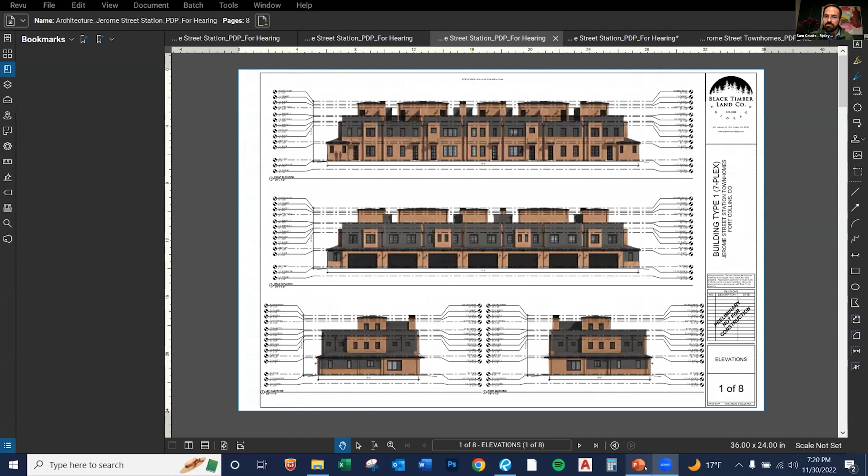Okay, thank you. Okay, can you see the screen there?

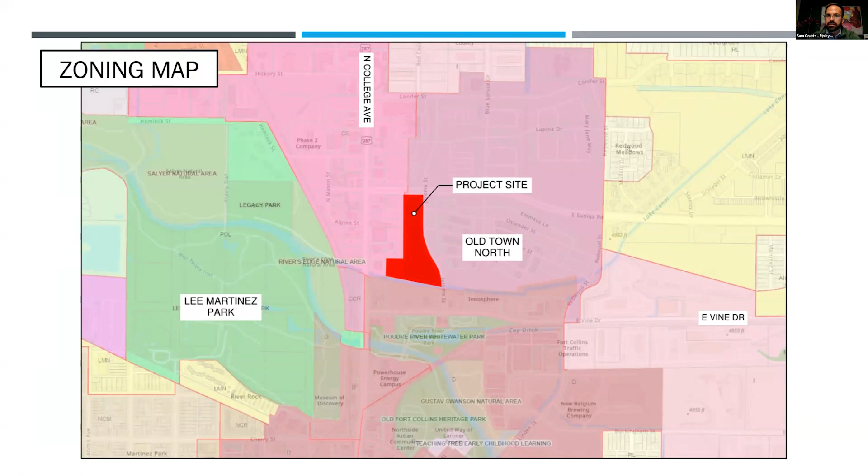Yes, thank you. Great. Again, my name is Sam Coutts with Ripley Design. I'm a land planner and landscape architect, representing the applicant, Black Timber Land Company, for the Jerome Street Townhomes. As Clark mentioned, here is the roughly 7-acre site. I really just wanted to highlight, as Clark did, the split in the zone districts here. We'll talk about that a little later.

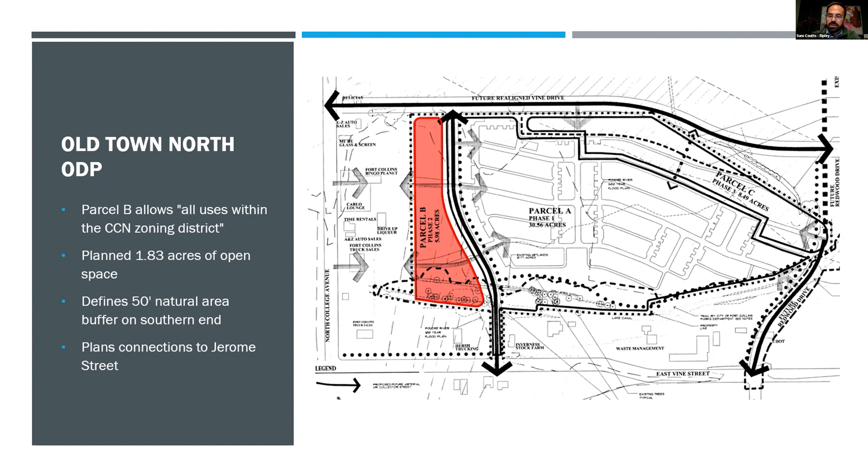To kickstart, just to bring you up to speed on a little bit of history here at Old Town North - this parcel was originally conceptualized as part of the Old Town North Overall Development Plan, ODP, highlighted here in red as Parcel B. The majority of our site lies within that Parcel B boundary, and Parcel B allows for all uses within the CCN zoning district. It doesn't place any kind of use restrictions other than that, or density restrictions otherwise. It does plan for 1.83 acres of open space and defines a 50-foot natural buffer on the southern end of the property. Additionally, it master plans some connections from Jerome Street - east-west connections for vehicular movement.

More history on the project - you'll notice as you review it that it started in 2020 with the same PDP number, which talked about a multifamily project. Just wanted to bring this up to show where we started. In 2020, we submitted the original PDP with 3 multifamily buildings and a small 3,000 square foot commercial space. This had one full round of review under PDP and a neighborhood meeting associated with it. It was a 4-story product with about 2 acres of open space. Through that process, we've learned a lot since then in the last couple of years.

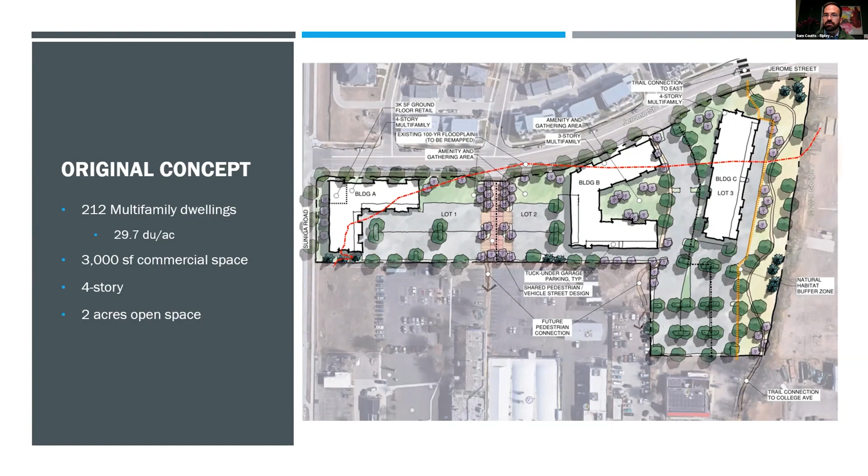We heard in that neighborhood meeting some concerns about density and height, along with changing market conditions and some technical issues we were running into with this project. We have since pivoted and are now presenting a single family attached concept here tonight, which is before you.

So this is the current site plan. There are 66 dwelling units in 12 different single family attached buildings, for a total density of 9.25 DU per acre. The buildings are oriented around the perimeter of the site along Jerome Street and Suniga, and then on the southern end along Lake Canal and a major walkway spine that defines the western boundary. We'll talk about that a little more later.

Each building is rear loaded through either a public or private alley, and all front either the major walkway spine or a road.

The project proposes 3.29 acres of open space, well above the open space originally envisioned in the ODP. There are 160 parking spaces provided, most coming through the 2-car garages each unit will have. There are 25 surface parking spaces scattered through the site - some on the north end with building 1, some between building 6 and 9, and then just north of building 10. There are only 132 required, so we're well over the requirement, and that doesn't include on-street parking on Jerome Street.

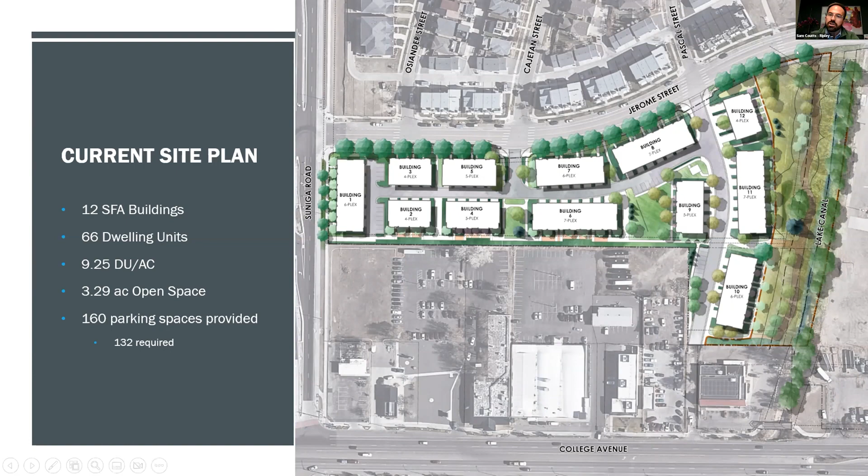Connectivity has been an issue at the forefront of this design, so I wanted to take a little time on that with this slide. The two main points of access for the development will be off of Jerome Street: one to the north, where there's an existing stub on Jerome Street for Cajetan to be extended.

As well as one on the southern end for Pascal Street. Starting with Cajetan, it's a private street stub that feeds into a private alley running north-south to load those rear-loaded, alley-loaded buildings. The public alley is dedicated along the southern end, a public dedicated right-of-way that creates an extension of Pascal Street, and this is a public alley.

It is a modified public street section, shown here on the left, and the purpose is to create something in between an alley and a street. It's an alley in the fact that we're rear-loading garages, so it'll feel and act as an alley, but it acts more as a pedestrian street that also contains vehicular movement. We've worked extensively with city staff, both engineering and planning, to create this meaningful connection between Jerome and College Ave, which the original ODP saw as important in this area. So that's the one piece of public right-of-way dedication on the site.

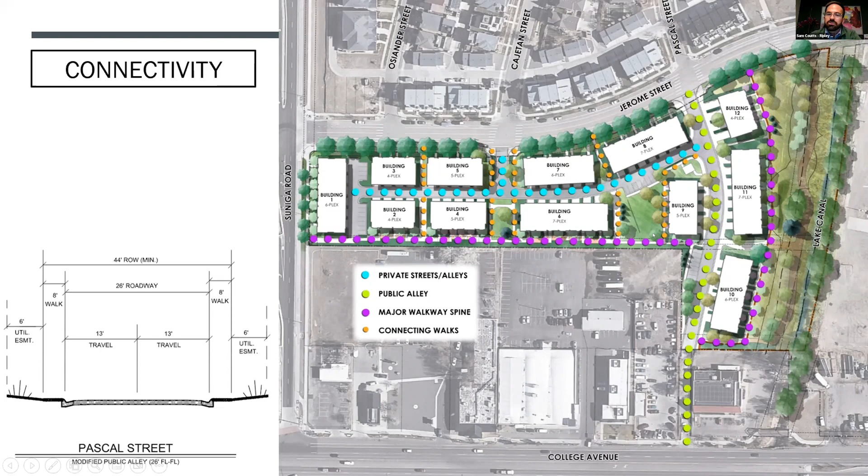Outside of on-street circulation, this project completes a connection for a public trail system. There's an existing public trail to the east in Old Town North, dashed in red here, which today dead-ends into Jerome Street. We'll be continuing that along the southeastern portion of our property, and the recently approved Powerhouse 2 development connects all the way down to the new Whitewater Park off of Vine.

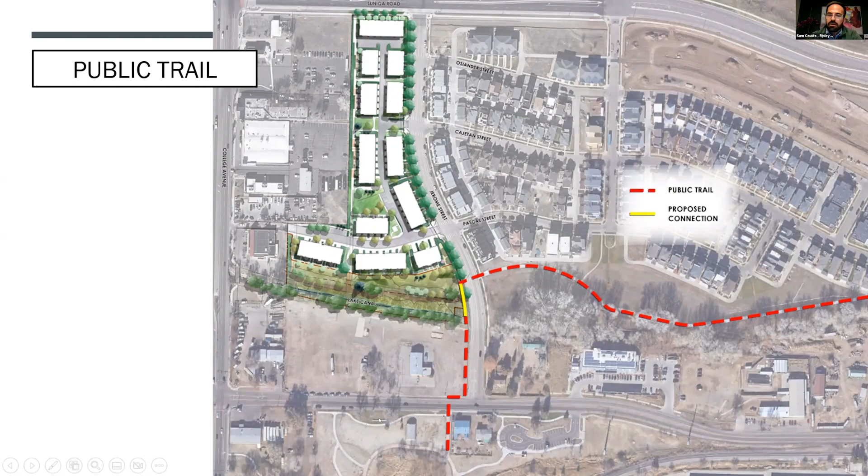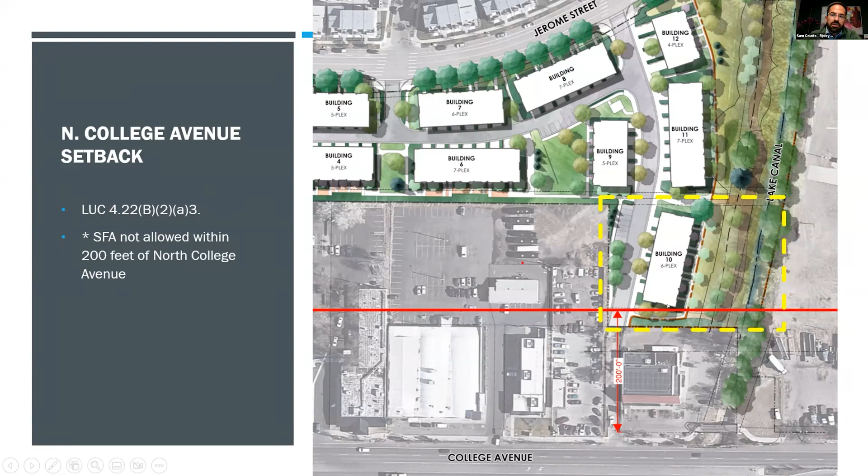Really quickly wanted to touch on this. This is the only really important piece of knowing the split zoning between the CCN and the CS - this parcel, as we know, is the CS. The only limiting factor from a design standard standpoint is that the single-family attached use is not allowed within 200 feet of the College Avenue right-of-way. So this is that setback.

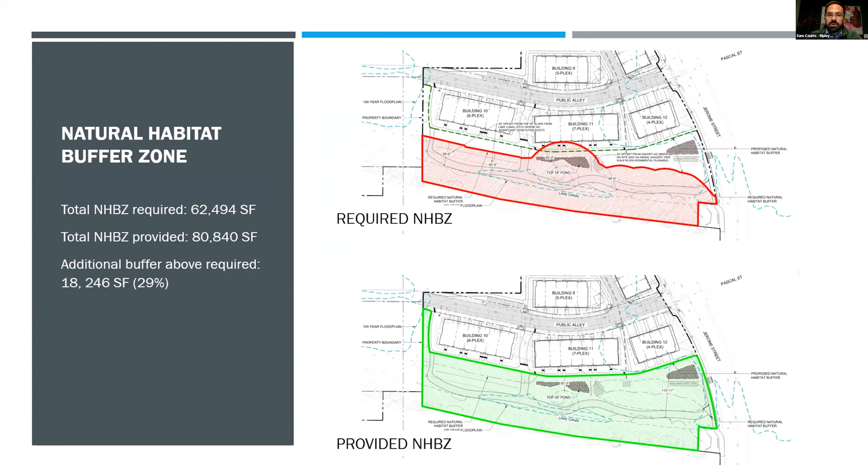The architecture here has taken a lot of those design cues, and the big idea also ties back to some of the industrial heritage of the North College corridor. That's represented in the materials - again we see a pedestrian-oriented brick base with a stucco middle, carrying the brick up to this half story that is a walkout rooftop patio. So these are 2.5-story buildings; the top is just a stairwell to the patio space above. The buildings have been broken down to mimic similar proportions of other single-family attached and single-family detached homes throughout Old Town North, creating these individualized units and helping create separation and scale.

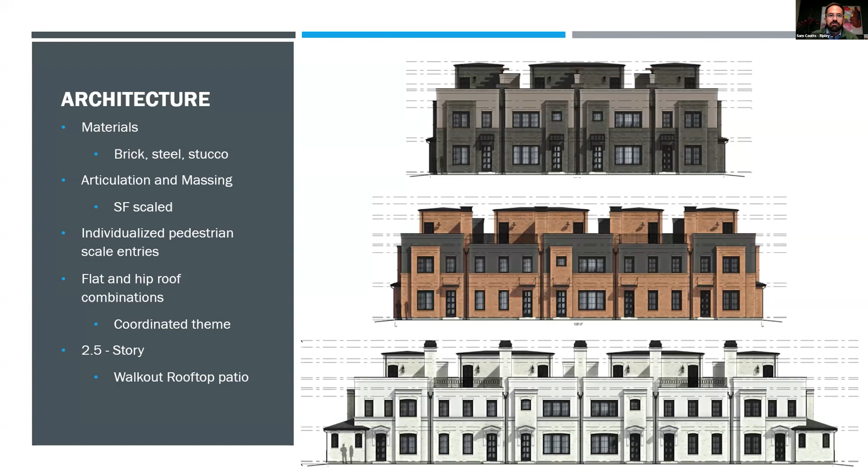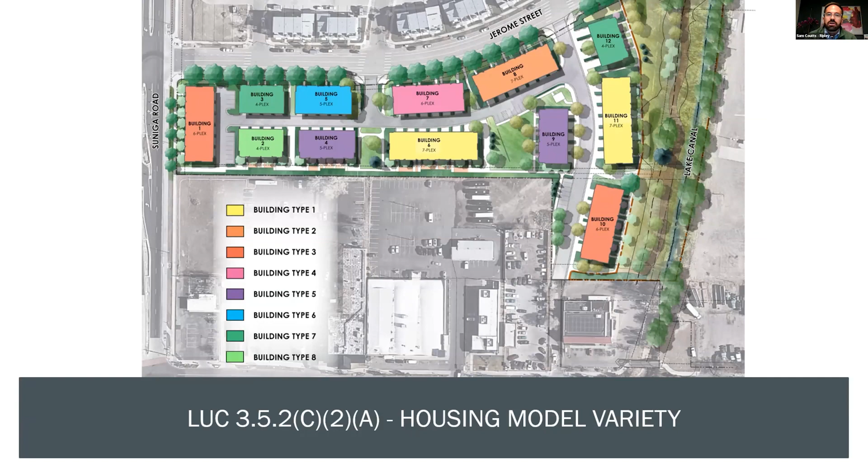As seen in this graphic, the land use code says not to place 2 similar buildings next to each other on a site. This really demonstrates how far away we are from doing that. There's a lot of variety between the 8 different building types, none of which are next to each other along a street, as the code determines.

There's also a requirement for variation among the buildings themselves, which is where we get into the building models and types. Between the 3 models, we have very distinct styles, and within those, further distinctions between a 4, 5, 6, or 7 plex footprint in size and shape. Within these designs, you'll see different architectural details such as individualized entrances with either a gable, shed, or flat roof canopy, window lintels, and how railings are picked up. The key here is looking at an overall coordinated theme, but still varied and different.

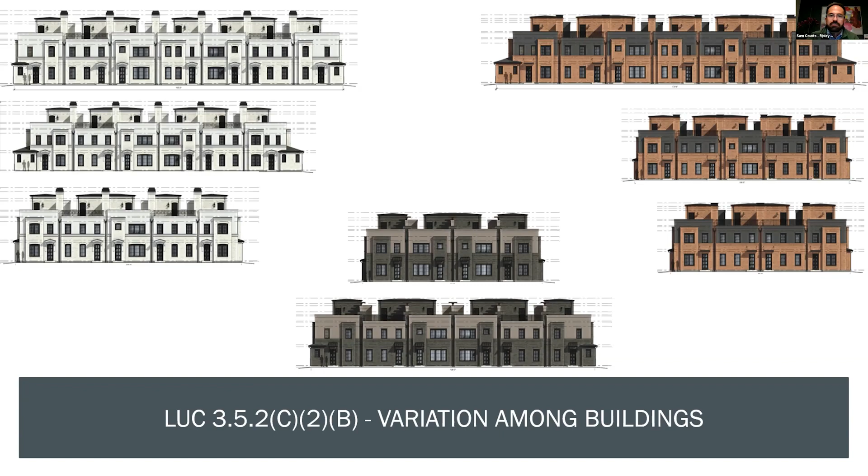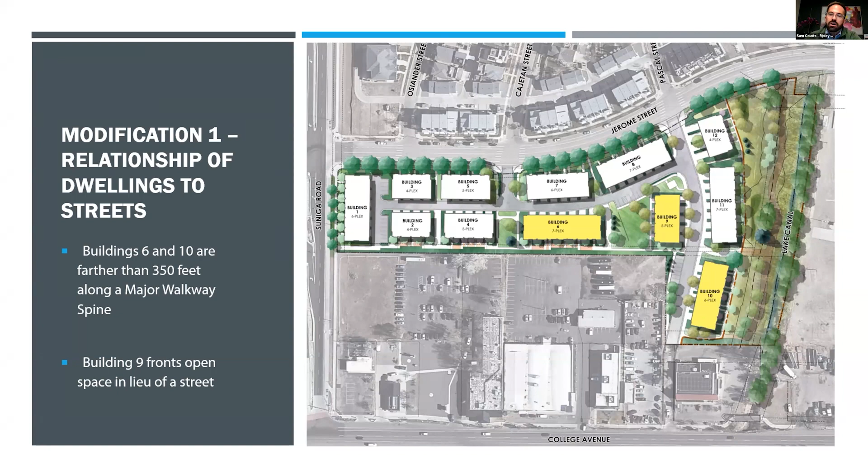There are 2 modifications proposed with this application. The first deals with the relationship of dwellings to streets, impacting 3 buildings on site. Buildings 6 and 10 are located along major walkway spines, which is allowed, but they are further than 350 feet from the nearest public street. Building 9 in the middle fronts onto a connecting walkway; however, that walkway bends around a building and crosses a private alley, which is not allowed by code. So in lieu, it has been faced toward open space.

It's been determined that this modification would not be a detriment to the public good. The main finding is that the intent of this standard is to create a strong pedestrian framework without sacrificing connectivity, which was apparent through our connectivity diagram earlier. Furthermore, it doesn't create any unsafe condition for residents or the public, and there are no other codes or standards violated by this modification.

In order to approve the modification, we've determined that this application promotes the intent and purpose of the standard equally well or better than a plan which complies. The purpose of this standard specifically is to promote variety, visual interest, and pedestrian-oriented streets in residential development.

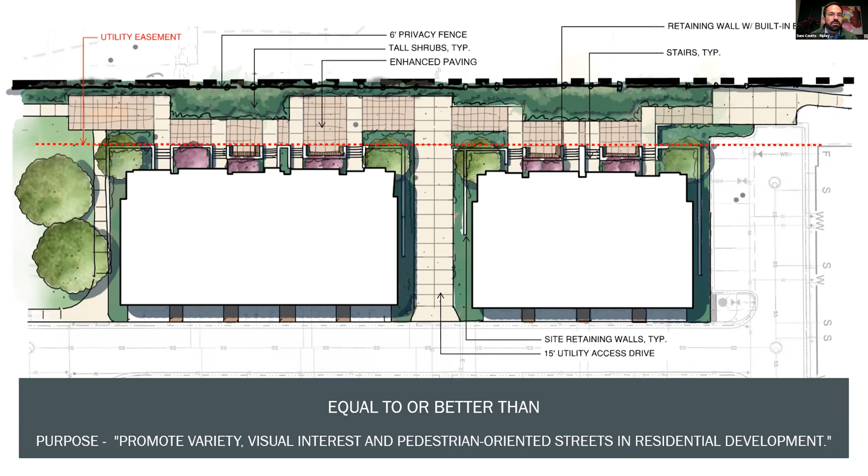This is an example of that major walkway spine on the western side, showing the level of detail these are designed to. It still meets all the definitions of a major walkway spine in width and character, clear sight lines, and tree-lined walk. Then it goes above and beyond, introducing articulated shrub beds, fencing, pedestrian-level details such as walls and benches, nice handrails, and enhanced paving to really boost visual interest through these corridors.

This is a quick sketch showing what it would feel like walking through that pedestrian spine, that major walkway spine. You'll see the articulated path, different paving styles, detailed handrails, walls, all of that. This promotes visual interest equally well or better than a standard that complies.

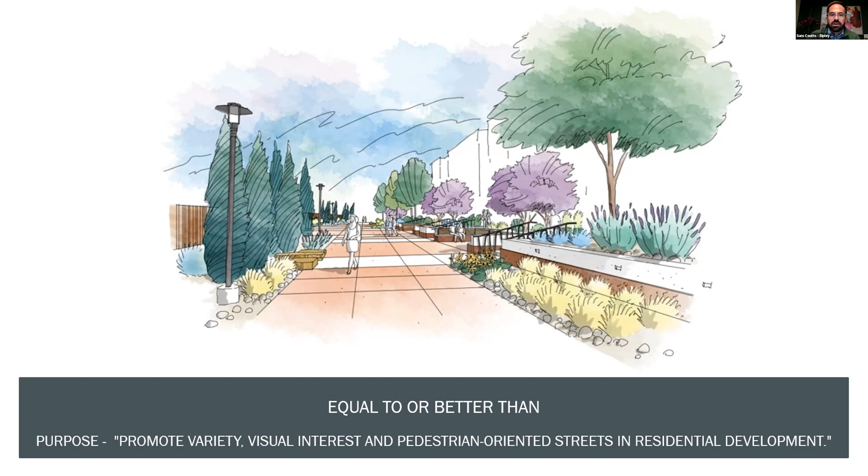The second modification reflects the street-facing facade standard. This standard says that every building shall have at least one doorway or entry facing an adjacent street that is smaller than a full arterial. There are 2 units on this plan where this does not comply: buildings 1 and 12 on the east side facing Jerome Street.

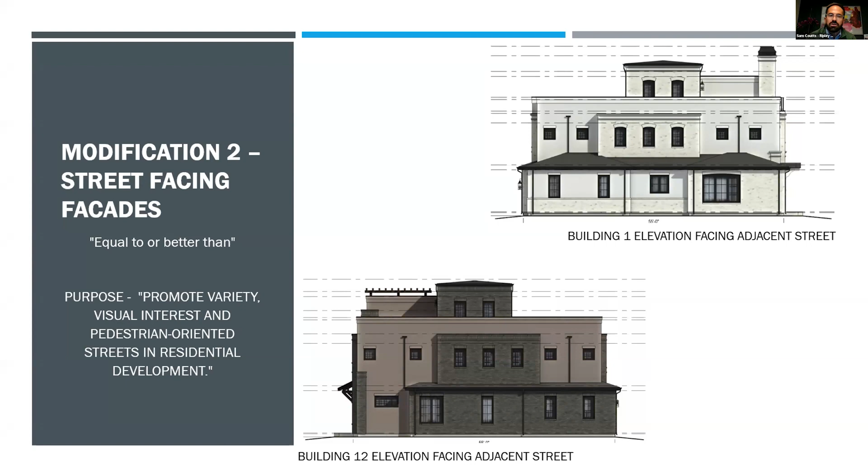Ironically, if you put a doorway onto this facade, it could meet code. In lieu, we've presented these 2 side elevations for buildings 1 and 12, which show a lot of extra windows, articulations in roof and massing, and even downspouts used to create a rhythm across those facades. This absolutely promotes the variety and visual interest purpose of the code equally well or better than one that complies. Furthermore, if it doesn't meet the criteria, we find it's nominal and inconsequential to the overall plan, being only 2 of the 66 units.

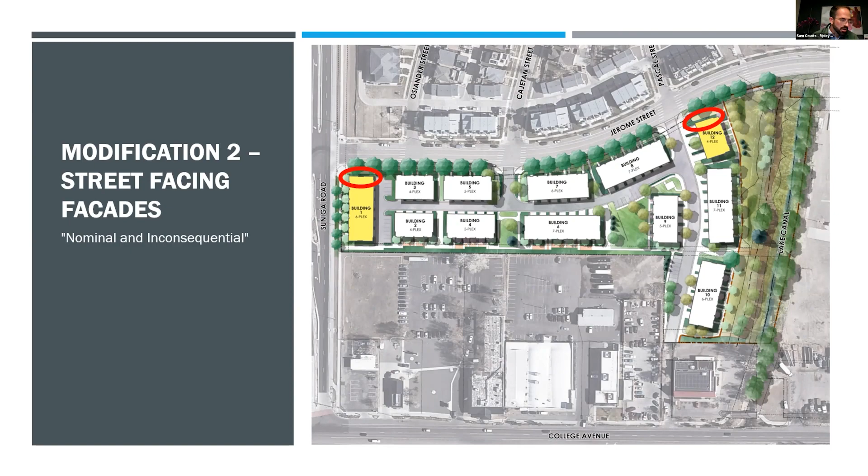So I think for now, I will stay there. We have lots of backup exhibits and graphics and our whole team here to answer any questions you might have.

Great, Sam, I appreciate that. The amount of visual detail you had in the presentation was very helpful, with the graphics helping in understanding the two modifications of standard requested as part of the application.

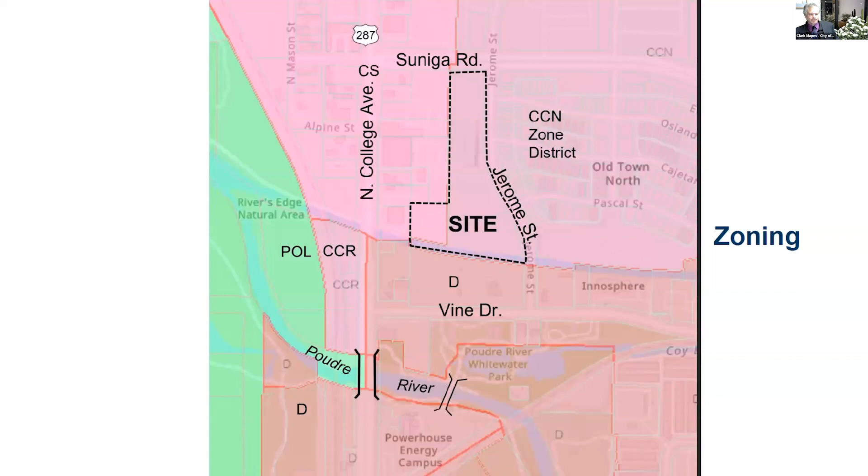Thanks. As I thought, the applicant's presentation really covered the main issues very well. I included a little bit more background on

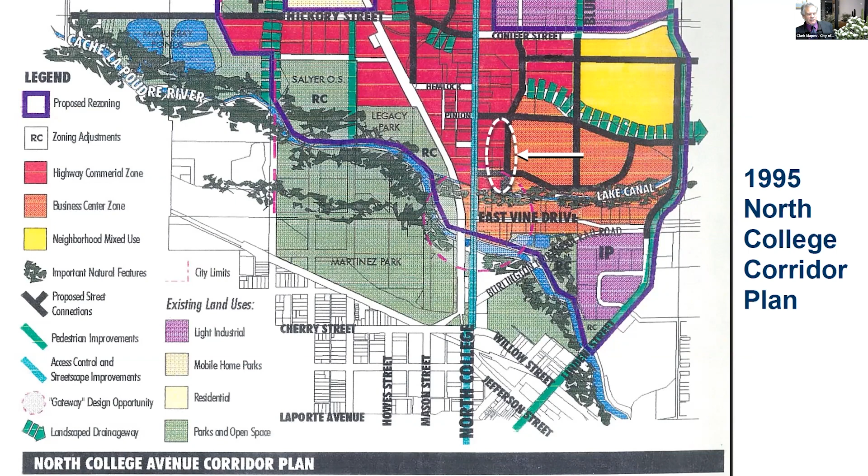how the Old Town North area even came to be, starting back in 1995 with the first ever North College Corridor Plan. The site we're talking about is generally here. There was no Jerome Street, no Suniga Road. This was in what turned out to sort of be Pascal. Just a lot of background, but I'll say this plan envisioned this area developing as a sort of downtown related, lower downtown, semi-industrial, contemporary mixed neighborhood, transitional between the commercial strip and more purely residential neighborhoods away from it.

That was 1995. Skipping to 2002 with Old Town North, the original vision and development concept for this property, which was floodplain. The developer had to fill this property and installed this street and block pattern, this infrastructure, all the utilities, finishing that work up around 2007.

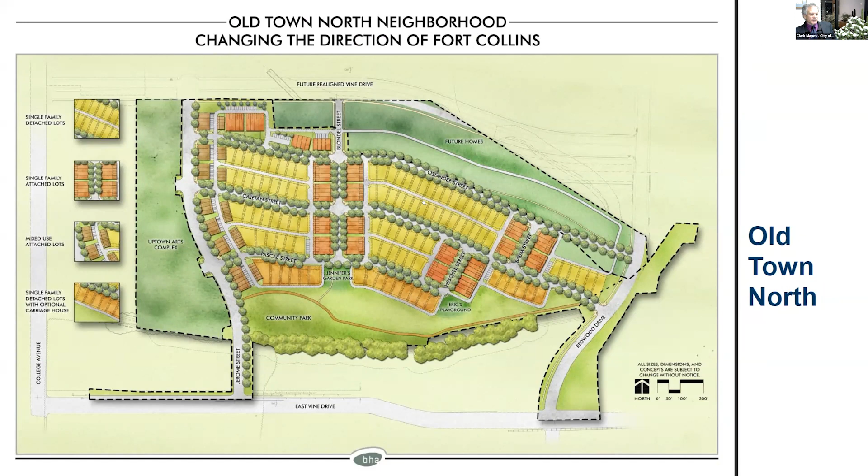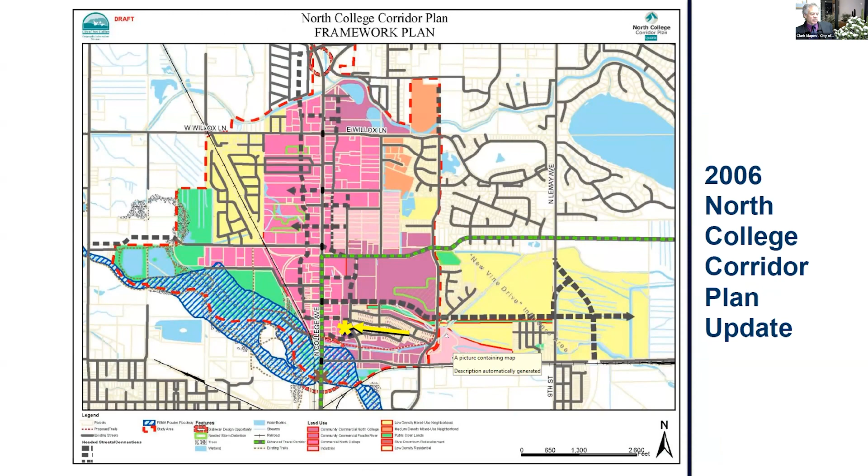If you think about that, that's a whole other story - the recession started in 2008, that's got nothing to do with this. There was an overall development plan done that followed the illustrative plan, and a 2006 update of the North College Corridor Plan. Again, it shows the site down here, this yellow asterisk, and you can see the idea of additional street connectivity, reinforcing the recommended preferred theme and design approach as a contemporary semi-industrial style for buildings, with more connectivity.

That's the plan. Just briefly, the staff report explains how all the general development standards for this project - Article 3 of the Land Use Code - apply to all development citywide. These conventional topics that almost every plan has were all met pretty easily and early on, subject to technical adjustments through multiple iterations. So there's not much to even present on the bulk of the site planning issues.

For the modification on the relationship of dwellings to streets, staff also finds that it would not be detrimental to the public good, is equal to or better than the standard, and that there's an undue physical hardship. These are the buildings you just saw in the applicant's presentation.

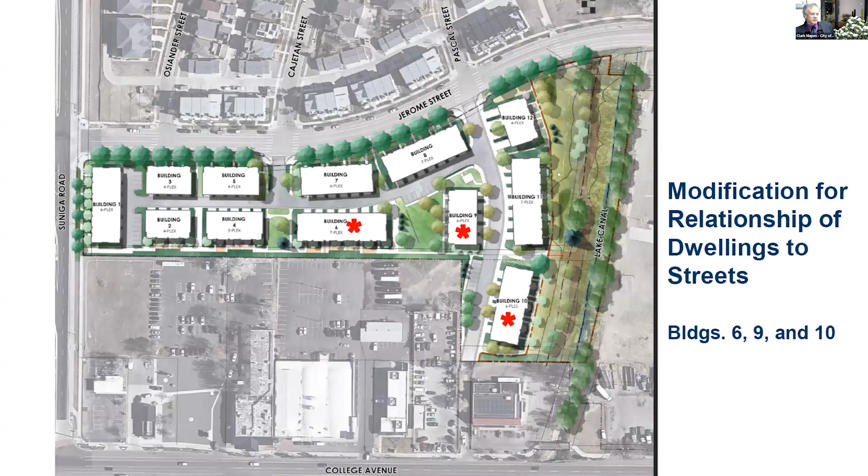The reason for staff's findings: part of the intent of that standard is for neighborhood streets to have the faces of buildings along them, not parking lots and blank walls. This plan covers that well - it calls for a framework of space that buildings fit into. In this case that includes the Pascal and Cajetan extensions, but the basic idea is there are tendencies sometimes for a development to have a building product they want to place on a site.

There's something in the industry that gets talked about - a sort of train wreck where a bunch of buildings are placed onto a piece of property to maximize it, and then you go back later and try to fit streets, walkways, and parking lots in between, as opposed to establishing a clear, legible framework of public space.

Sam mentioned this - the physical hardship aspect. The strip along Jerome, the property along Jerome, is narrow. Also, the southern part - by the Lake Canal, which is the southern boundary of this site - is riparian forest with large mature trees and a natural habitat buffer zone. Once that buffer zone is protected, the east-west area of property along the south part is very narrow, and that affects whether it would have been possible to interject more streets for buildings to face onto. So that's part of the physical hardship finding staff made.

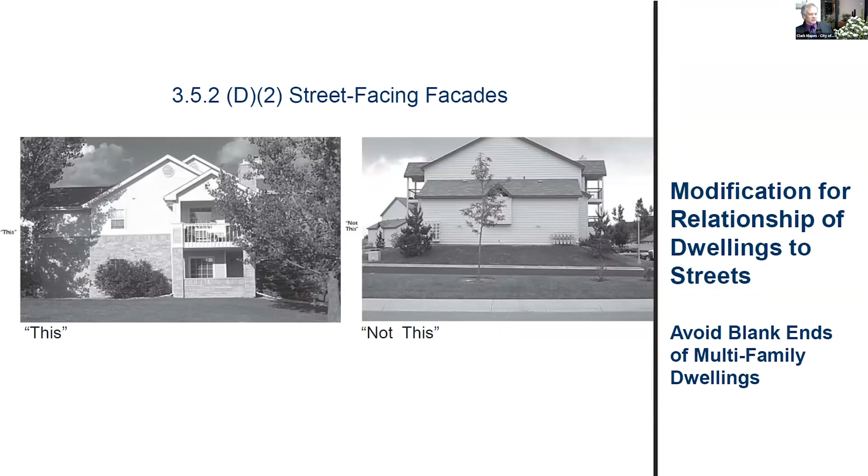That was more detail on Pascal and Cahaton. You've seen this — that's the modification for the street-facing facades.

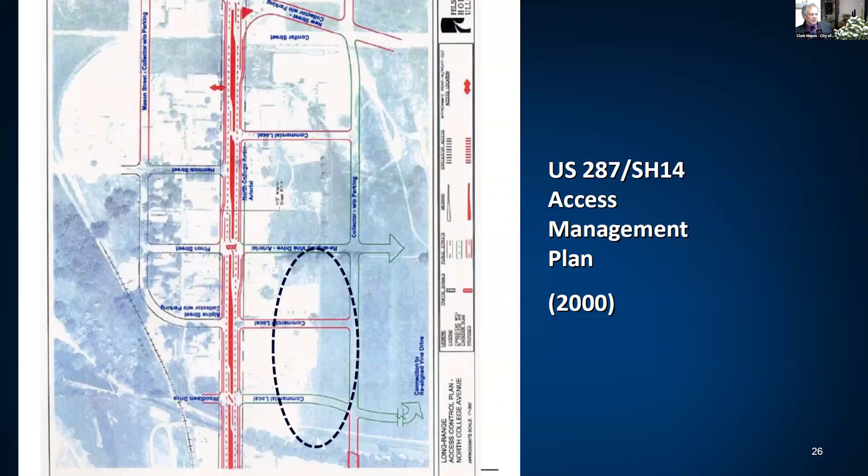It looks like that's it. Staff's recommendation is approval of the two modifications of standards: the orientation to a street sidewalk connecting walkway, that's 352D1, and the facade standard for the ends and sides of buildings, D2. Staff recommends approval of both.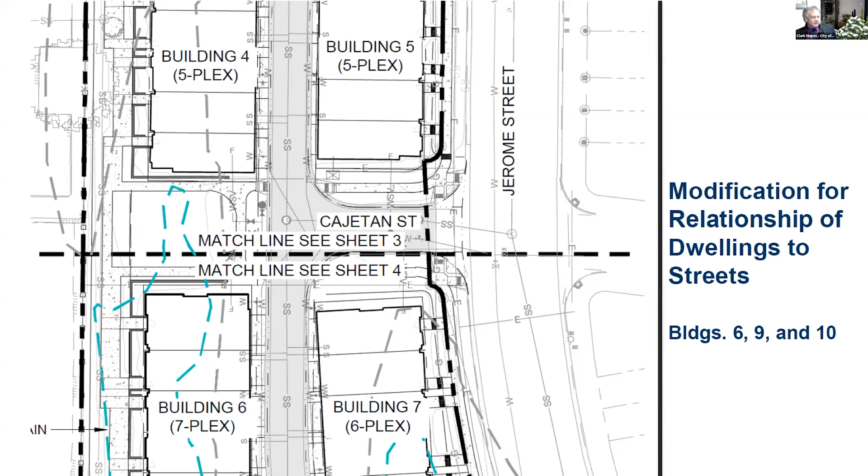And then as far as the Pascal situation, there's an existing alley that runs along the north edge of a pawn shop that's there, but it's an existing access easement. So this property will extend a public right of way, or sort of an alley-like feature, that will tie into that access easement. Someday maybe it'll become right of way, but that's already there.

Okay, thank you, Clark. And just to confirm, staff is recommending approval of this project and recommendation of approval of the two modifications of standard, correct? Both the relationship to streets and the street facing facades, right? Staff is satisfied that those are. Okay, and the facade modification is pretty simple to get your head around. The staff report has a couple of pages on the public space framework in lieu of a street and block network that you can read at your leisure in detail, but it's all been pretty well presented here tonight.

But okay, yes, recommending approval, yes, with no conditions or anything.

Great. I'm not sure I have a copy of Sam, the applicant's PowerPoint yet. Granted, I did not have a chance to check all of my emails this afternoon, so if that's already been sent, please ignore that request. But if it's possible to get a PDF version of that report for my file, and to have the opportunity to review that in a little bit more detail, I would appreciate it. Absolutely, I'll get it sent over. I appreciate that.